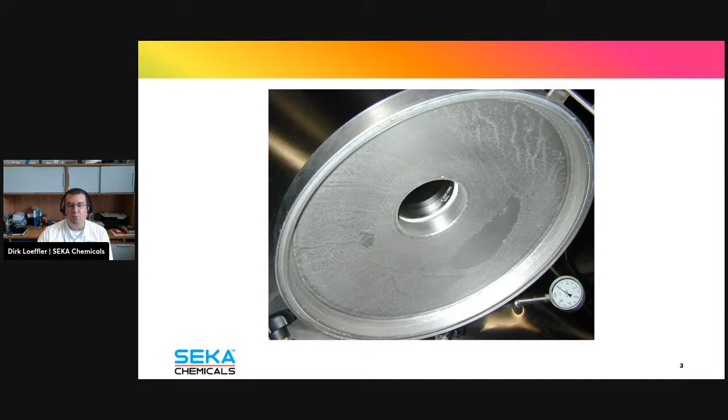And some things that people take for granted. You open up the brew kettle lid and it looks like this. You look into a tank and it looks like this. You look into a tank, it looks like this. Clearly, you see the biofilm everywhere there.

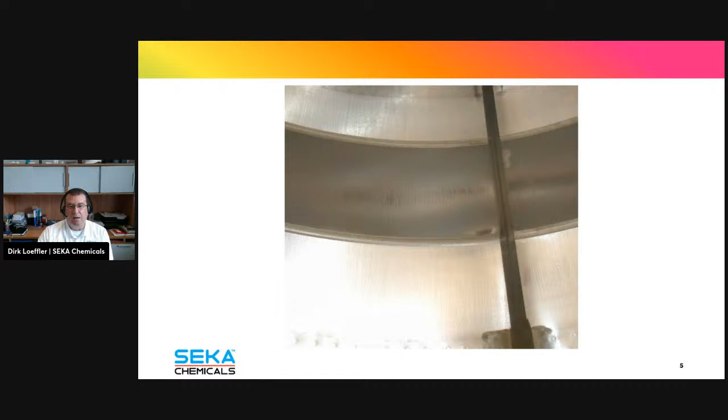How come that even large breweries, we're talking several hundred thousand barrels output a year, don't recognize that some of the equipment is not clean?

Well, I did some thinking, and I think I figured out why this is. Should be easy, right? Well, no. I thought about it, it's really only easy if you know what you're looking for. So I want to get a little bit into this.

So today we have all these wonderful tools that theoretically should make it really easy for us to determine if something is clean or not. ATP testing - keep in mind this only works with organic matter. All of us who paid attention in biology know that ATP is produced by living cells.

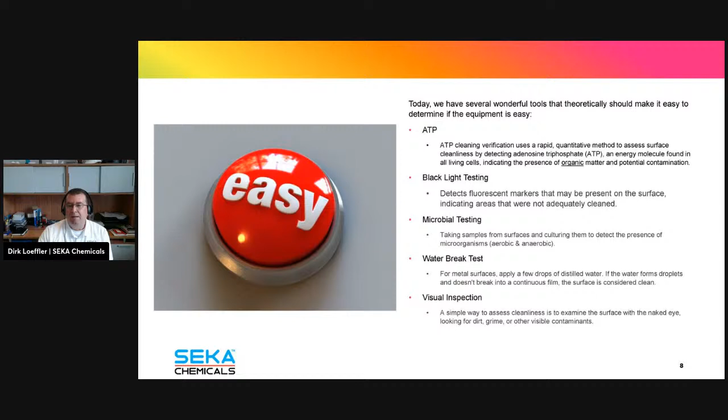Blacklight testing is an easy one. We can do swabs and do microbial testing, put it in the lab and see what happens. Water break testing is an easy one, not always very decisive, but there's visual inspection. You look in the tank and you think, is it clean? Is it not clean? But somehow with all of these, we're still not getting there.

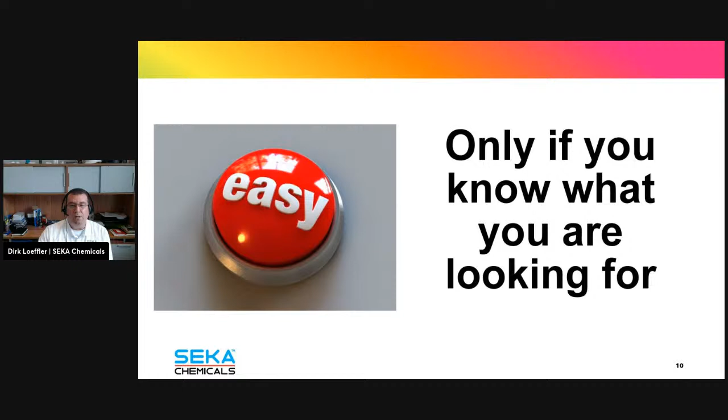And it should be easy, right? But the reality is it's not. Let's figure out a little bit why. It's really only easy if you know what you're looking for. So what does that even mean? Let's take an example here.

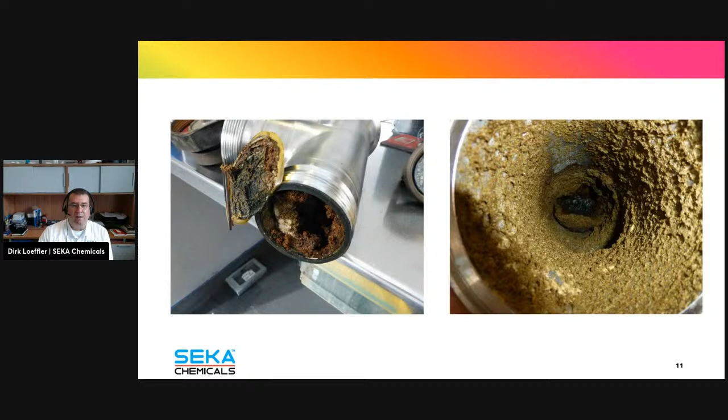So these are all pictures I took in breweries. That is the real thing. This brewery actually operated like this for many, many years. This is a tank top assembly, and when we took it off, it looked like this. You're just scratching your head and saying, how can they not catch this? Well, this is how the tank top assembly was installed on the tank. So the brewery kind of relied on it getting cleaned, right?

Well, this is the CIP spray ball coming down here, and this is the tank top assembly. You think that this spray ball is going to clean this? I don't think so. But again, you have to think about this to really notice, hey, yeah, this is not going to work.

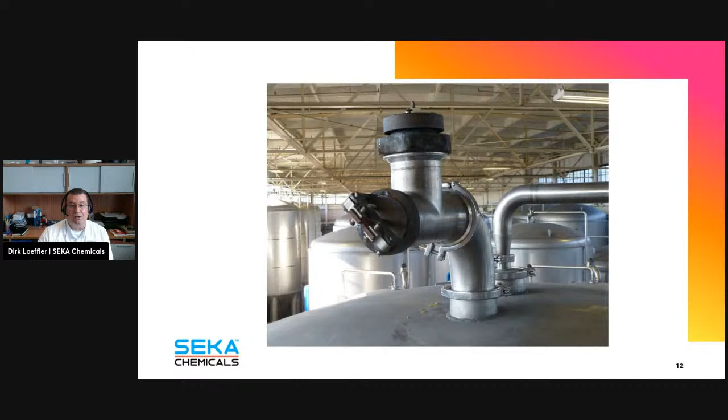So theoretically, they had to climb up here every single time, disconnect this fitting, clean it by hand, and then reinstall it. Problem is, this is a 270 barrel tank. This is actually 30 feet up in the air. So it's not really easy to do.

Okay, another example.

This is a brewery here in Atlanta that bought some used tanks from a large brewery in the Pacific Northwest, installed them in Atlanta, used them for a relatively long time, and then they started to run out of capacity, so they started to top fill in their tanks, and suddenly they had micro problems. They called me eventually and said, Dirk, can you come out here and take a look at this? So I look at everything and say, okay, what's this up here?

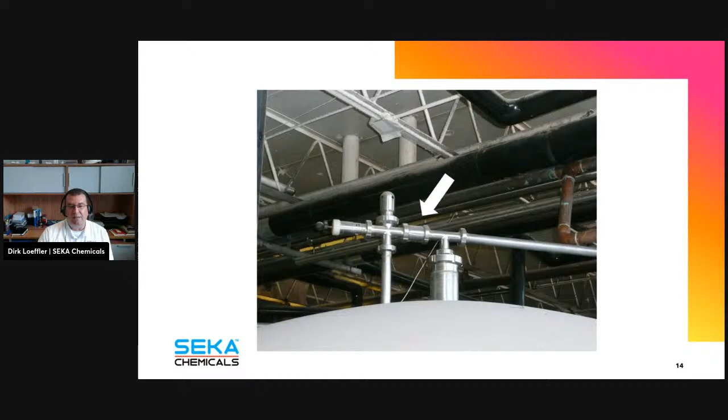So again, this is the CIP spray ball, but the CIP spray line also goes down here and cleans the tank top assembly. Well, what happened is that this check valve was actually reversed, so water could never get in there. In fact, the pressure from the tank could escape into the CIP system, which was fortunately capped off on the bottom here. But they relied on the fact that these tanks came properly assembled when in fact they were not. So it is sometimes simple things like these that you just overlook and you wonder, okay, how could I have missed this? How can we miss this?

It's like, well, sometimes we cannot see things because the surfaces with contamination are right next to surfaces that are actually clean. And we can only see the clean part when we do a quick visual inspection, and we don't really break the whole brewery apart on a regular basis to do things.

But what I really came to the conclusion is that almost every time I come into a brewery and there are problems with the cleanliness of the equipment in the sanitary conditions, it is because the basic principles of cleaning were not really completely understood. Best efforts were made, but nobody really was there to tell them what they needed to do and how they needed to do it. And not everybody is a physicist and knows about fluid mechanics and laminar and turbulent flow, etc.

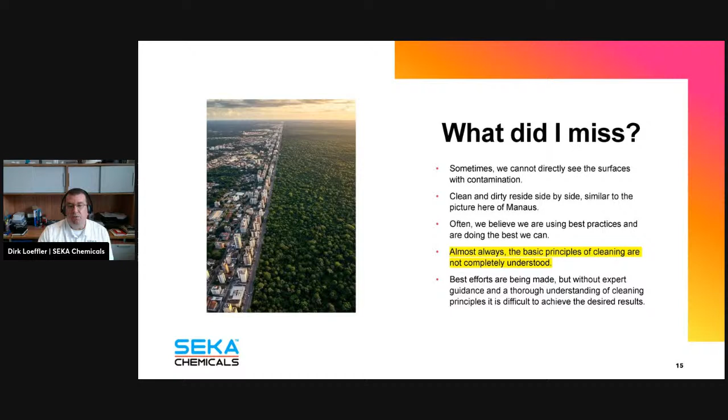Well, turns out if you're in a brewery, you kind of need to make yourself familiar with these things. So let's take a look at this. How did they miss it?

First of all, one thing that I'm always complaining about in the industry, and that's why I'm always thankful for people like Andrew to put these things on, is that he allows these presentations to be on here, and he does promote sanitation and cleaning. Many of the other organizations just don't do that. The MBAA does it a little bit. The BA has pretty much done away with that completely. The guilds are not really focusing on that.

So where do you get the information from? There's a lot of misinformation on the internet. The Facebook and the Brewers Forum, sorry Andrew, are not expert advice. Oftentimes you get even worse advice from people who know even less than you or are doing it completely wrong. Unfortunately, most chemical suppliers don't even provide the expert advice either. Their people are salesmen. They are being told use this here and use this there. They're not engineers. They don't know fluid mechanics. They don't know what soils are in there. They call on a bunch of different industries. It's not their knowledge base.

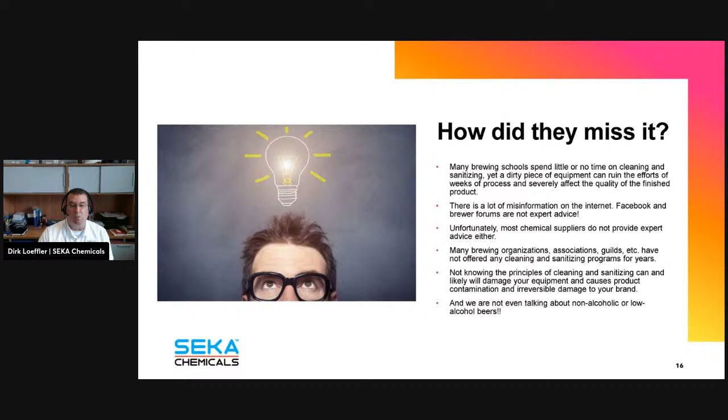So we're not even talking about non-alcoholic or low-alcoholic beers here. We're talking about regular beer that doesn't even promote pathogens. So what's the key to success here?

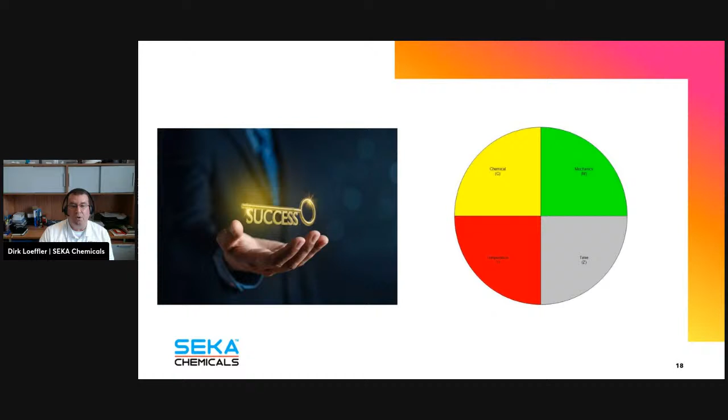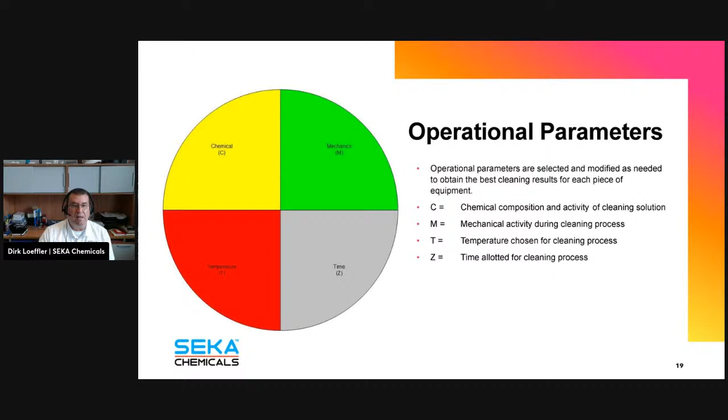Well, the key to success is actually really simple, and it lies within this very simple circle. It is either called the sinner's circle, or I actually personally call it the synergistic circle, because I like to think that all these four factors work in synergy together. These are the operational parameters when we do cleaning. There's equipment parameters, system parameters, but these operational parameters is what we play with on a daily basis when we're trying to get equipment clean. Chemicals, mechanical action, temperature, and time. And to some degree, these are interchangeable, but within limits.

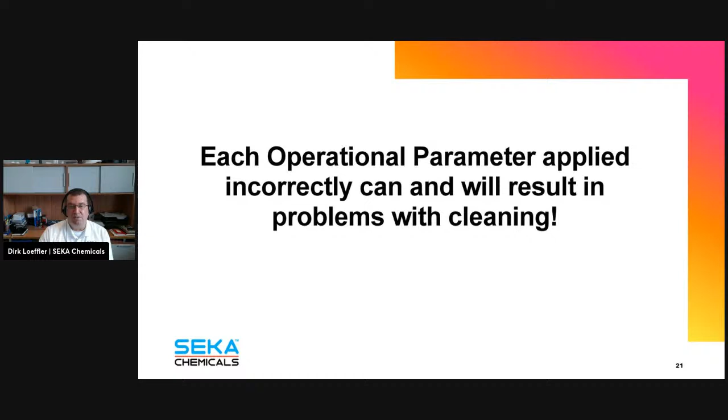So the problem is that each operational parameter applied incorrectly can and will result in problems with cleaning. So it is important that we are kind of familiar with all these four factors and have somebody who guides us a little bit how they should be applied.

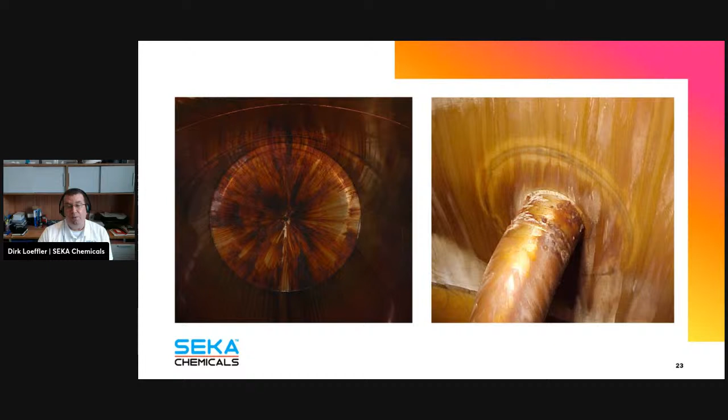This one here didn't even have a CIP spray ball. This one here was a brewery in the northeast here. They found out they have a problem with the hot liquor tank because suddenly it sprung a leak at one of the welds here. Well, turns out we had problems with chlorides, but again, they never really paid attention to these.

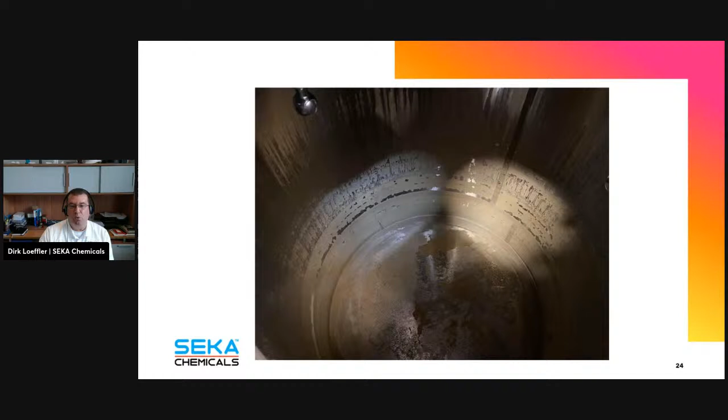Scaling in your hot liquor tank, plain old water chemistry. As you increase alkalinity and or temperature, the hard water constituents are less soluble, they precipitate out and cause scaling in your tank. The problem is that if you also have chlorides and hot water in there, which you do in a hot liquor tank, the scaling can actually promote chloride pitting and chloride stress corrosion when the scale is present. So this is actually something that promotes stress corrosion cracking and chloride pitting.

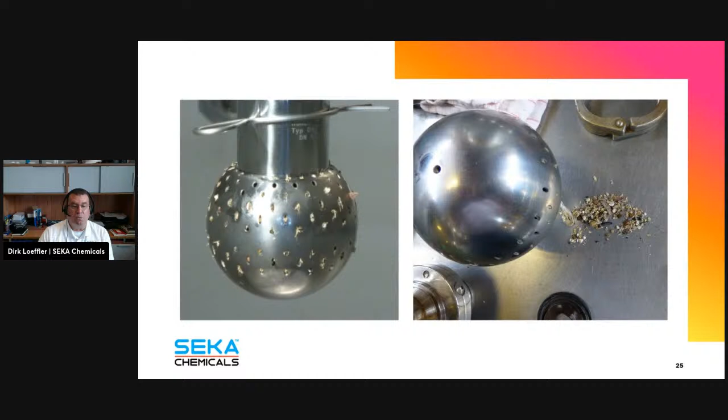Here you have a wort line. Believe it or not, this is actually a wort line in a brewery, or was a wort line in a brewery that's now defunct for good reasons. We saw this on the outside when we opened up the tri-clamp, and we're like, whoa, this is not good. So we took this valve out, and without going into much detail, this is what the butterfly valve on the inside and the gasket actually looked like. And this wasn't the only one.

So maintenance is also a big factor in your brewery. There's an old saying: if you don't schedule maintenance for your brewery, it will schedule the maintenance for you, and it's usually at the most inconvenient point in time. Put these things on a schedule. These are wear and tear parts. You need to replace these eventually, especially when they're operated quite frequently. They will wear out, fray out, and they will start contaminating your system.

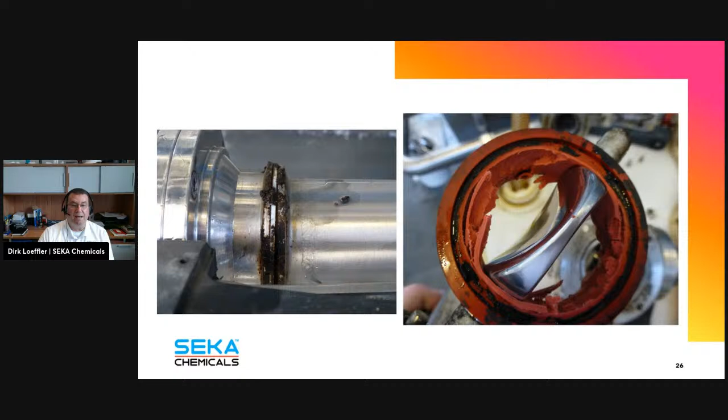This is where soil harbors. And if you take an ATP, sometimes we find maybe like 2,000-3,000 on the pipe, but then we find 150,000 light units on the gasket and behind the gasket. So this is major. Less than 1,000 is considered clean.

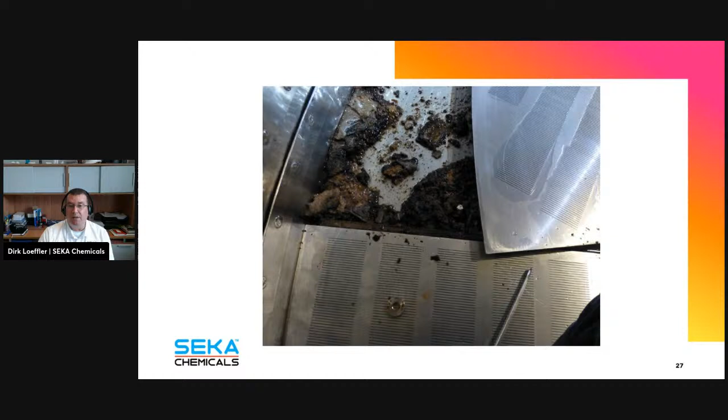That's just laziness. This should never happen. But again, I've seen this, and not only once. You've got to remove the false bottoms. You've got to clean underneath there. If you don't do it, it's not good.

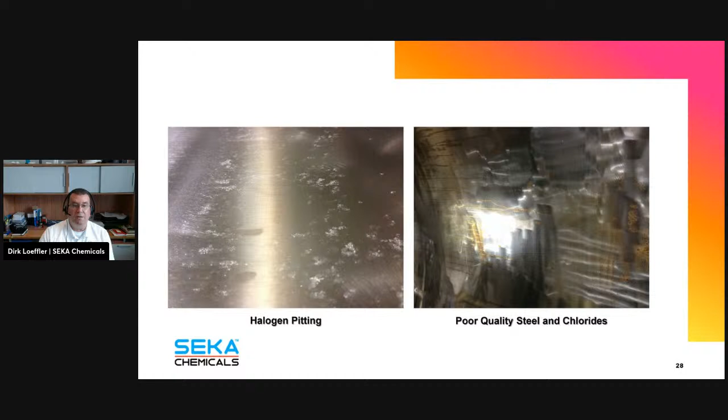Mechanical energy, halogen pitting. This is another one that I see in a lot of tanks. Chlorides are detrimental to stainless steel, and given the wrong circumstances, the wrong pH, the wrong temperature, the high enough amount of chlorides, it will attack your stainless steel. It will leave permanent damage, and it will cause problems in your tanks and in your equipment.

This is an example from a 1,000-barrel tank, brand new tank, first time used. The brewery was using iodophor as their primary sanitizer. They had a problem with their dosing system. It put a huge slug of iodine in the tank and ruined the brand new tank in one single CIP cycle. It takes only one cycle to wreck your tank. This is the result afterwards.

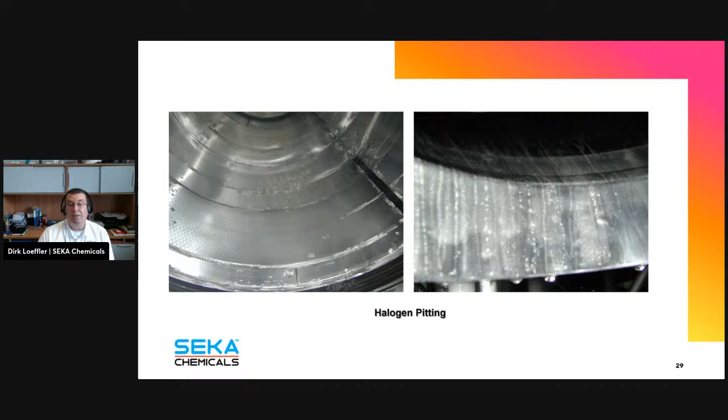1,000-barrel brand new tank. Fluid mechanics, I think, is the one thing that I see is the most misunderstood part of the operational parameters, and also the one that causes the most problems. So I'm going to go on a limb here and say in 90+% of all cases where we are called to a brewery and told, I can't get this clean no matter what I do, we find that there are underlying fluid mechanical problems. Let's take a look at this a little deeper here.

Even after cleaning, I'm going to tell you there's a 99.99% chance this is a fluid mechanical problem. Here it is very important to understand the difference between flow velocity, laminar flow, and turbulent flow. You need turbulent flow on your equipment to remove soil.

It is very important to understand that chemicals prepare soil for removal, but the chemicals do not remove the soil. That is done by mechanical action. In your case, in the brewery, that is your water. Your water circulating through the system needs to circulate at a certain speed, which causes friction at the surfaces, and this friction in turn causes the water to become turbulent, and this turbulence is your mechanical energy that actually removes the soil.

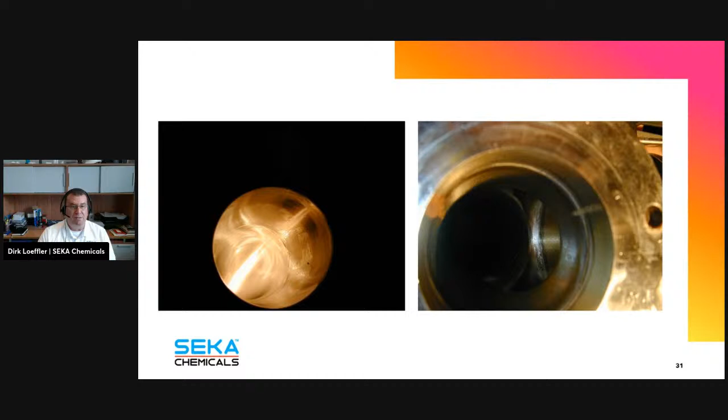So if you're using your wort pump, which is designed for gentle moving of wort, you don't want to get shear in your wort, and try to do a CIP cycle with that at the same flow rate, you're probably not going to get great results. On the other hand, CIP pumps are designed to really rip through the system, get you a high flow velocity, which then in turn produces turbulent flow. So it's very important to understand this.

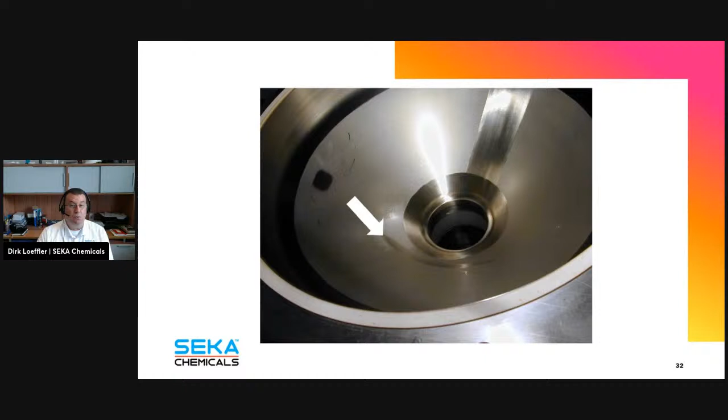How can I tell easily if I have a fluid mechanical problem? So you see this little smudge mark here. When you just cleaned your equipment and immediately afterward go into your equipment - I think I have another one here - you can just wipe the soil right off. Chemicals have done the job, okay?

What you're looking at here is a fluid mechanical problem. For some reason, the soil that has been prepared for removal has not been removed. Most likely that's because, in this case, this is the bottom of a larger tank. Probably the water has pooled here and has not flowed here at a very rapid speed, and as a result has caused these deposits to just remain behind, okay?

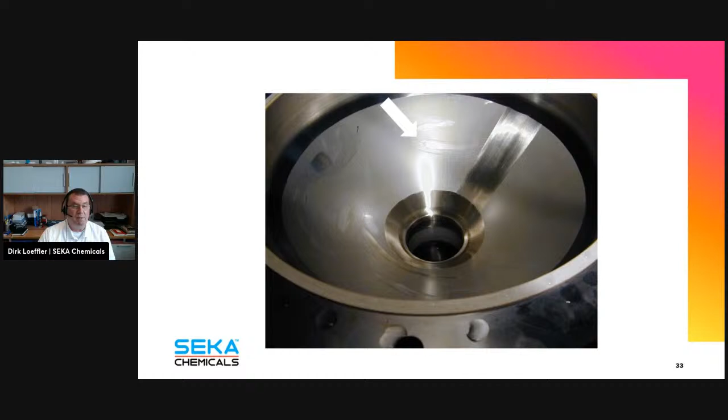And if we really start looking around, we often find cracked valves. So if you have a CIP system, you're trying to balance the flow, right? What goes in must come out, and you try to have this the same, otherwise your holding tank is either going to fill up or it's going to completely drain of liquid. So you're trying to balance that.

Unfortunately, what happens a lot of times is the bottom outlet is a product pipe, which can be up to 2-3 inches in diameter, but the inlet is only a single spray ball. So very often you get a disproportional flow on the supply side and the return side.

So in this particular case, what happened is the brewery decided, well, we're going to balance the tank by just cracking the return flow and limiting the flow going back into the tank, and that way we balance the system. Well, what does that do though? It slows down the return flow on the return side through all the pipes that are actually process pipes, whereas the supply side is not a process pipe. The result was all this deposit being left behind because there was no turbulent flow.

Okay, you can reverse this. Big brewery in California, a very well-known place. We walked in there, I looked in the tank and said, 'Whoa, you've got problems here.' And the guy said, 'What are you saying? This tank is clean.' I said, 'You've never seen a clean tank.'

So we start looking at this, and the guy explained to me that we have to restrict the supply pipe because our return pump cannot keep up, in this case, with the supply out of the spray ball. So I said, well, let's try something. We put 2 pumps side by side, which doubled our return. We opened up the supply valve on the spray ball on the supply side, and in one CIP cycle, the tank was clean.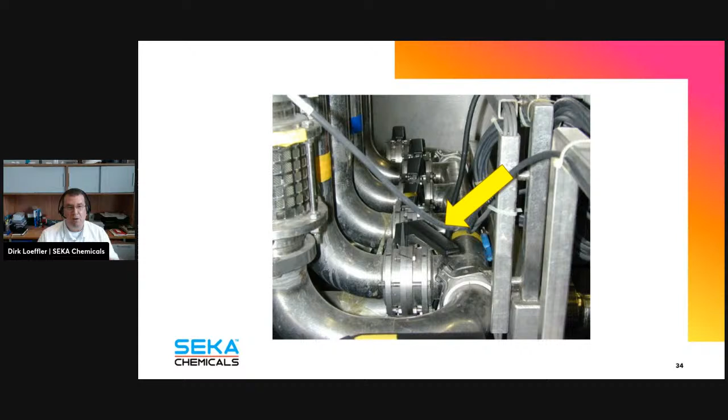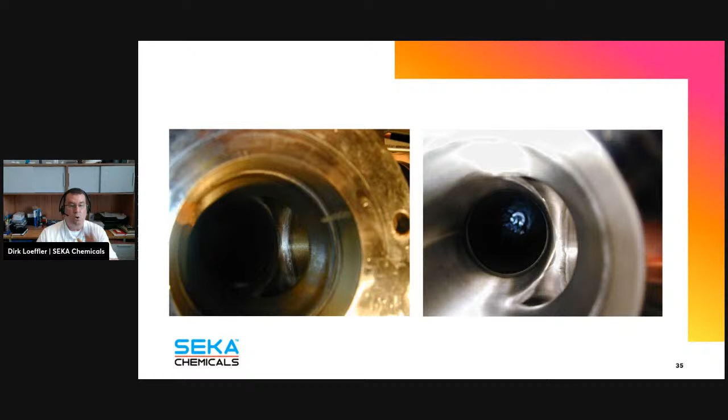Okay, so it is fluid dynamics, and the amount of flow and the amount of film that runs down the sides of your tanks is critical to successful cleaning. Literally cracking that valve from halfway cracked to open brought us from this to this in one single CIP cycle. This is literally one CIP cycle, and the only thing that we changed is opening that valve.

A quick word on chemicals. This is a short talk, so I could talk about this all week long, getting into the fluid dynamics and how to get turbulent flow and what we need to look out for. Maybe I can hit Andrew up and we can schedule another, maybe longer, session where we talk more in depth about the fluid mechanics.

Today I'm just trying to point out what the problems could be. On the chemical side, what we have here is similar conditions where, in this case, the previous brewer obviously was not very diligent about cleaning his tanks, and was also using a PBW type product, and didn't rinse it properly. The problem with these metasilicate-based products is that if you don't rinse them properly, it's essentially a liquid glass.

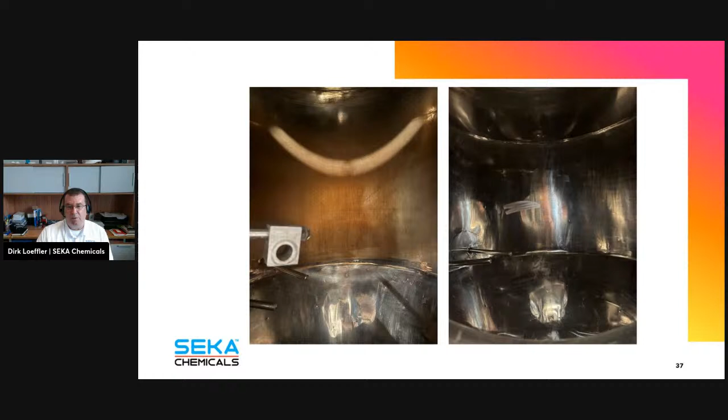So kind of as a summary here: understanding the principles of fluid dynamics and mechanics, the effects of temperature on equipment and the cleaning process, how your choice of chemicals and their composition may affect your results and your equipment, and that you have to operate within the performance envelope of your equipment and process.

Best example here: do not start swapping out spray balls from different tanks. Each spray ball is designed to perform in a certain diameter tank, a certain volume tank. If you start moving these into larger tanks, or for that matter even smaller tanks, or pump too much liquid into the spray ball or not enough liquid into the spray ball, it will cause problems with the performance of that particular spray ball.

Validate. Do not believe what's going on is actually going on. Look, make sure that it's actually happening. Perform at least an annual audit or have your chemical supplier come in and do it for you.

If you are a larger brewery - we do it for our larger customers, and for my smaller customers as well if they ask - establish and follow SOPs for your processes. And when I say establish, you also have to follow your SOPs.

People get very creative in the way they clean, and we see it so many times where from one shift to another shift, one shift has no problems with the tanks, and the other shift has a bunch of problems. Why is that? Well, one shift is following the SOPs and the other shift has their own completely different set of SOPs that makes it a lot easier and more convenient, but stuff doesn't get clean.

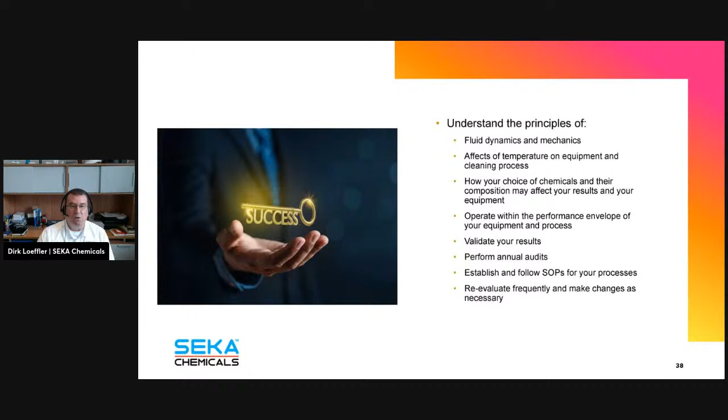And that was pretty much it for today here. I see I have one little comment here.

What are the main basic principles for cleaning that every brewery should know by heart? Well, hopefully Carlos, I've answered your question. It really is to understand the four operational parameters that are present, and know how to work these within your performance envelope. The reason why I'm always saying be careful when you ask other breweries what works - what works for one brewery does not necessarily have to work for you. Could be a different water condition, different water hardness, different styles of beer.

Okay, you may be making non-alcoholic beers that requires a completely different approach, much more thorough than when you make regular beer that doesn't grow pathogens.

Now, in my opinion, there's only one clean, and that is 100% clean, 0 counts every single time. That is the only acceptable clean in my book. But unfortunately, we see that's not the case, and I don't think it is necessarily negligence. Sometimes it is, definitely, but more often than not, it is really just simply not knowing enough about fluid mechanics and how they interact within your system.